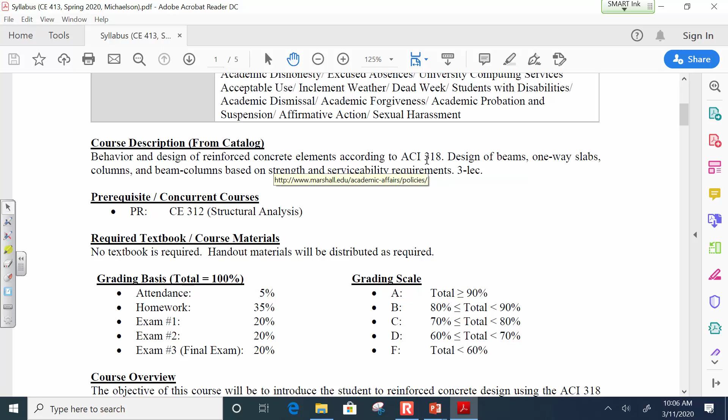Okay. All right, then let's get back to the wonderful world of concrete design. So last time what we were talking about was shear. We hadn't quite finished this example, but ultimately this is what we're going to plot, and this is going to become clear here in a little bit. So I'm going to do the math to come up with this plot very, very quickly, and then I want to talk about design. The analysis for shear capacity is really, really simple. It's very plug and chug.

All you do is you compute Vc, which is your shear strength provided by the bare concrete, which is 2 lambda b d square root of f'c, and then you compute the capacity provided by your stirrups, by the steel, which is the area of your shear reinforcement, the yield stress of that shear reinforcement, and then d over s, which is the number of stirrups that cross a given crack region. And then don't forget for shear, phi is 0.75. There is no determination of phi, it is just always 0.75.

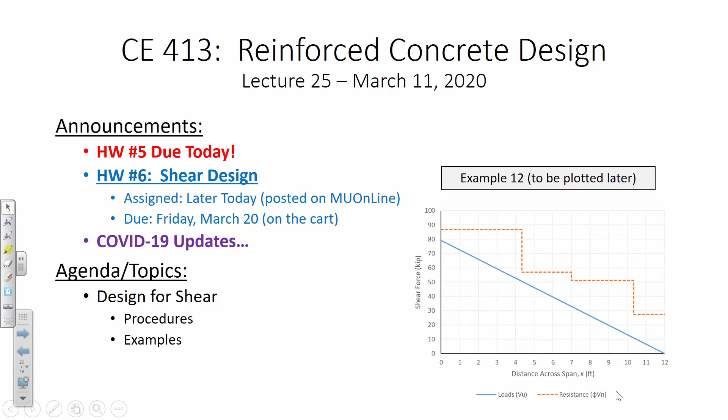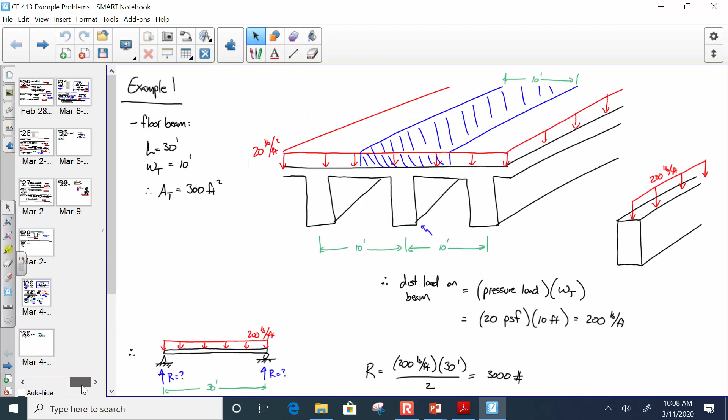Now what we had done last time was we looked at this example, and let me pull up the notes. It decides to load. So this is sort of what we had done last time. We looked at the beam and we decided that it was a simply supported beam with a uniformly distributed load, and so it turned into a structural analysis problem. Now our uniformly distributed load in this case is going to be 6.6 kips per foot because that's the factored load on the structure. The reactions ended up being 79.2 kips. And then we broke out some CE 312 structural analysis to determine an equation for shear.

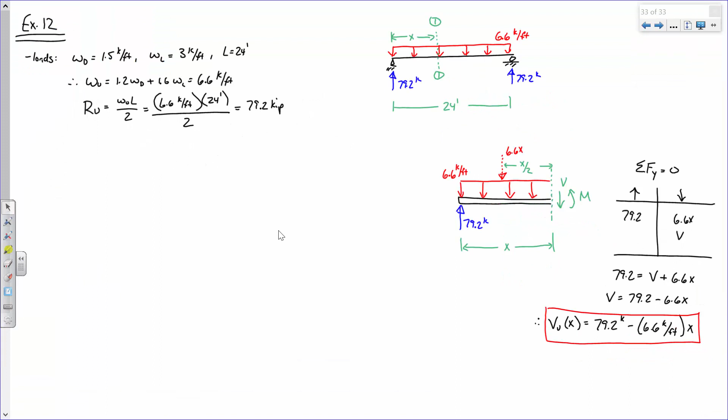I'm going to tell you right now, that is a skill you're going to need here, being able to determine equations for shear. We're going to need that. That's not going to be some academic exercise like it might have felt like last semester. We desperately need those expressions in order to lay out our stirrups. Now, that's the load, okay? And actually, let me break out this spreadsheet.

We had also started to plot this on a spreadsheet, and while it loads, I'll go ahead and move forward. I'm going to sort of cut all of this off. I'm just going to do my work inside here. Now, what I knew that was going to happen. All right. What I'm now going to do is look at the shear capacity. Okay, so the first thing I'm going to do is I'm going to compute the capacity provided by the concrete. So Vc is 2 lambda bw d square root of f'c, which is 2.

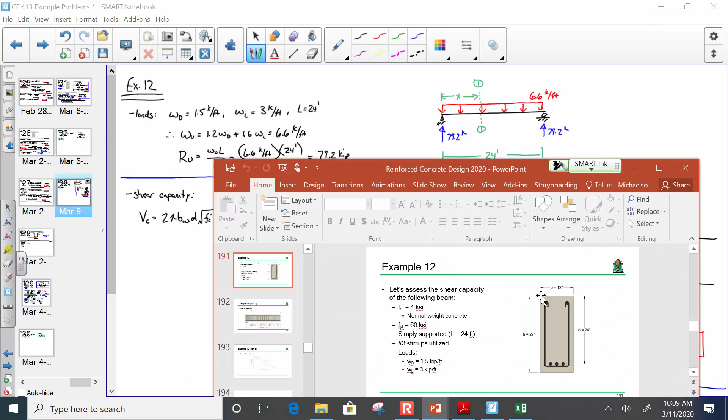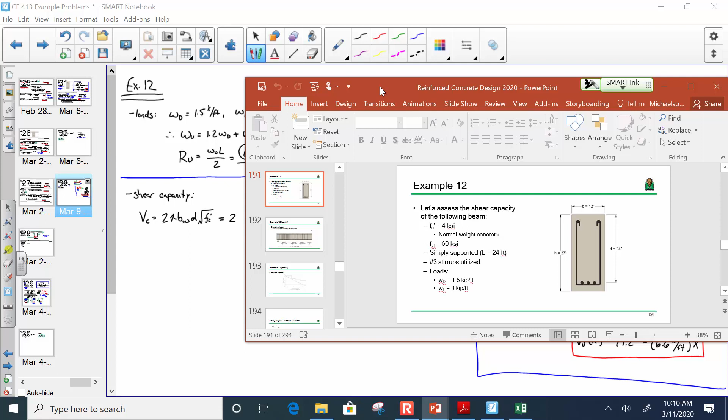Now let's go back to the beam, make sure everybody remembers what's going on. Here was the beam. So we have a beam that's 12 inches wide, and then the effective depth is 24 inches. It's 4 ksi concrete, and we assumed it's normal weight. So if we got normal weight concrete, what is lambda? 1. And then this is 12 inches, this is 24 inches, and this is the square root of 4, right?

No. Put in psi, and you get out psi. So I saw somebody, I said, this is the square root of 4, right? And I saw somebody shaking their head. Nope. Put in psi, get out psi. It's not 4, it's 4,000. So, plug and chug, and so what do we get as an answer here?

Anybody have an answer? Good. 3035.8. PSI. That? Yes. Wait, hold on. So it's 3035.8. I forgot the 12. Sorry. Hold on. I got 36,429. 36,429. Yeah. Now, what are the units for the answer?

So let's say for region 1. Okay? So S is 4 inches, D is 24 inches. Now FYT is 60 KSI. Now the big question also is, what is Av? Okay? Now does anybody remember Av? That's the area of your shear reinforcement. Now let's look at our beam. Let me close this. Let's look at our beam. Come on. Oh Lord. Computer's being slow today.

Now here's our beam. Now we have number 3 stirrups utilized. Now I can tell you the area of a number 3 bar is 0.11 square inches. Okay, that's a lookup. All right. Now if the area of the number 3 bar is 0.11, what is the area in shear? What's the area of our shear reinforcement for this beam? 0.22. And how did you get that? Well, and you're doubling it because if I crack across this beam, I'm cutting through 2 bars. Okay? So for this problem, Av is 0.22.

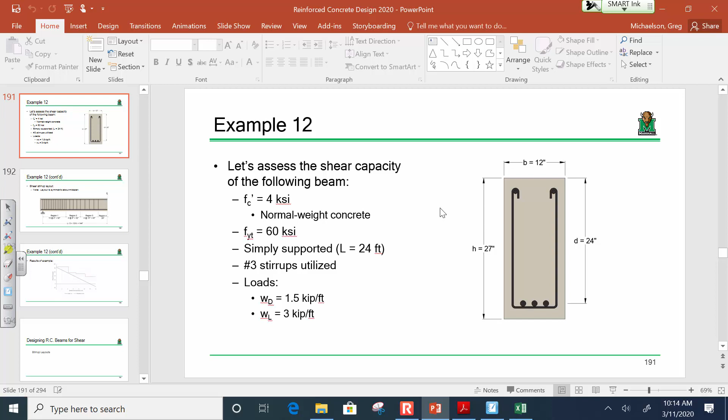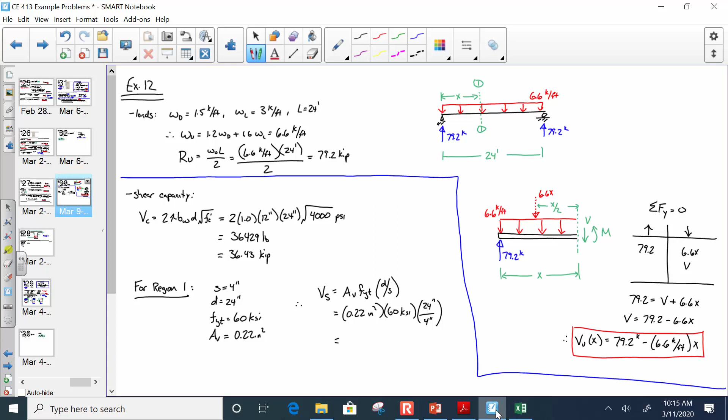All right? And again, the reason why is because we have a stirrup like this. If we had a stirrup like that, Av would just be 0.11. Okay? So the shape of your stirrup affects what your Av calc is. That make sense? So Av is 0.22 square inches. So VS is Av FY D over S. All right, 24/4. And so what is VS? May I have an answer? 79.2. 79.2 kips.

Okay, so therefore, phi VN is phi VC plus phi VS, which is 0.75 times 36.43 kips plus 0.75 times 79.2 kips, which is what? And don't forget your phi value. So when you're computing this, really the things you got to watch out for is don't forget phi, and recognize that you have to add kips to kips. Like you can't add pounds and kips. You got to make sure the units are consistent. So, everybody have an answer on this one?

Anybody? 86.7 kips. Thank you. 86.7 kips. Do I have a second on that? Okay, so let's sort of draw ourselves a little table here on the board, and we'll replicate this on Excel here in a second. So we have what? 4 regions. Okay, so I'm talking about these regions right here, okay? Now, with region 1, our S value, we said was 4 inches, okay? Everybody with me on that? Now, based on that, what did we get for phi VN? That's kips. Remind me, what did we just get? 86.7? So 86.7.

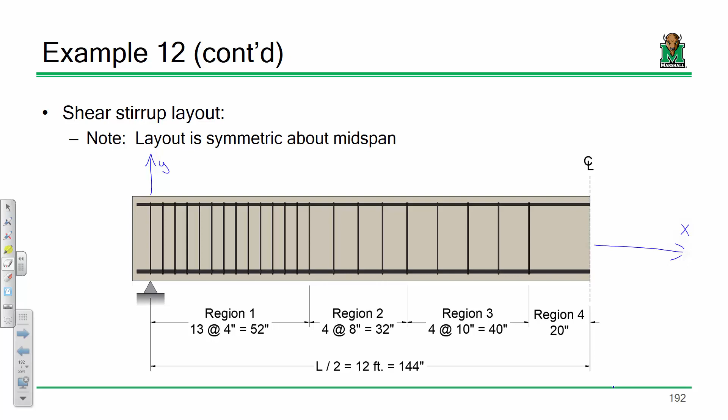So the beam's 24 foot long, and I'm only going halfway. But that doesn't matter because this beam is symmetric. You know, the loading is symmetric about the center line. So once you figured out what's going on up until the center line, you're good to go. Does that make sense? So let's go ahead and do the remaining regions. So help me out with this.

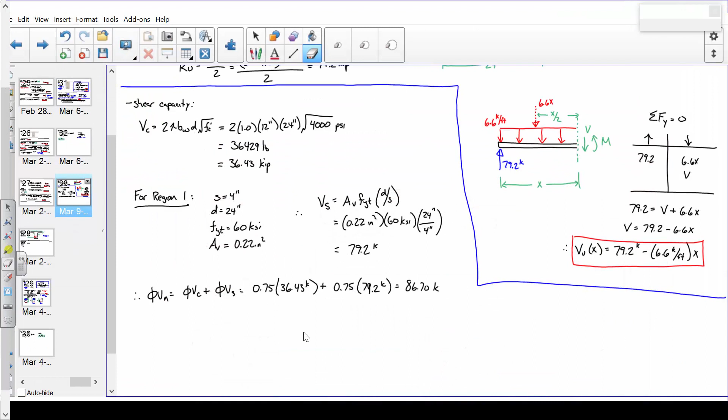So, okay, so somebody help me out, all right? Who's got a calculator? Mr. Schwartz. Help me out. If S is 8 inches, tell me what VS is. Everybody see what we're doing? Instead of 0.22 times 60 times 24 over 4, times 24 over 8. 39.6. 39.6. Anybody second them on that?

Okay. Now, with that value, tell me what phi Vn is. So 0.75 times this plus 0.75 times that. 57.02. 57.02. Do I have a second on that value? He's shaking his head yes. Okay. Since you're shaking your head yes, I want you to help me with the other one. So let's do S equals 10. Tell me what Vs is and then ultimately what phi Vn is. Start off with Vs.

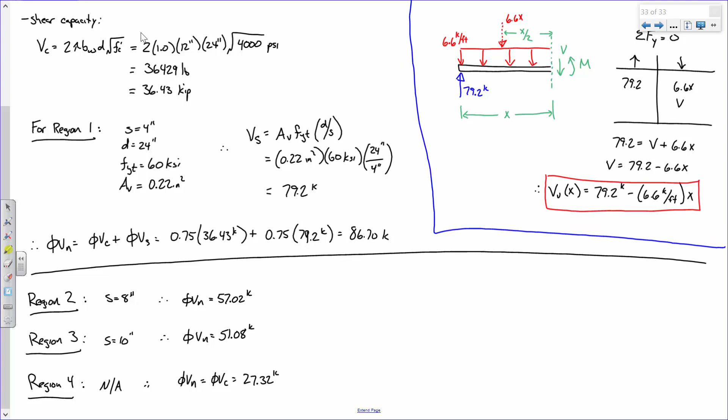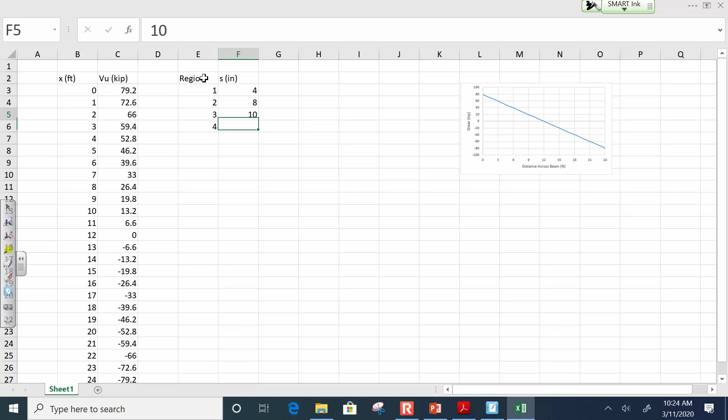So, for example, I can go over here. So this was the Excel problem I was doing, right? So maybe I'll do a little calculation over here. So what is it? So we had what region? 1, 2, 3, 4. So we have 4, 8, 10. And so what did we get? VS. So this is, those are the answers we got for VS, right? And then we have VC.

VC is 2 times 1 times 12 times 24 times the square root of 4,000. But that's going to give me my answer in pounds. Need to divide that by 1,000 to get kips. Right? And so phi Vn is pretty much what we got, right? 87 or 86.7, 57.02, 51.08, 27.32. Everybody with me on that? Okay.

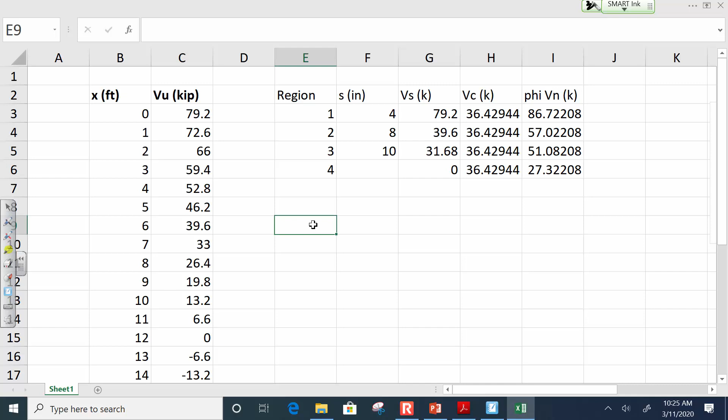Now, let's look at these regions. Okay? This is from x equals 0 to x equals 52 inches, right? This is from 52 inches to 84 inches. So far, so good? But the problem with that is if you look at my plot, does everybody see how my plot is in feet? So maybe what I ought to do is convert these to feet.

So what is 52 inches in feet? Help me out. 624. No, other way around. 4.3. So 4.33 feet. Okay, so this is 4.33 feet to what? What's 84 divided by 12, 7? 7 feet, and this is 7 feet to what? What's 124 over 12? Say again? 10.33. And this is 10.33 feet to 12 feet. Is that a fair statement?

So, let's look at a new plot. So, okay. So you're telling me from 0 to 52 or to 4.33 feet, the capacity is that? Is that what you're telling me? And then from that to that, the capacity is that. Then from 7 to, what is it? What was that, 124?

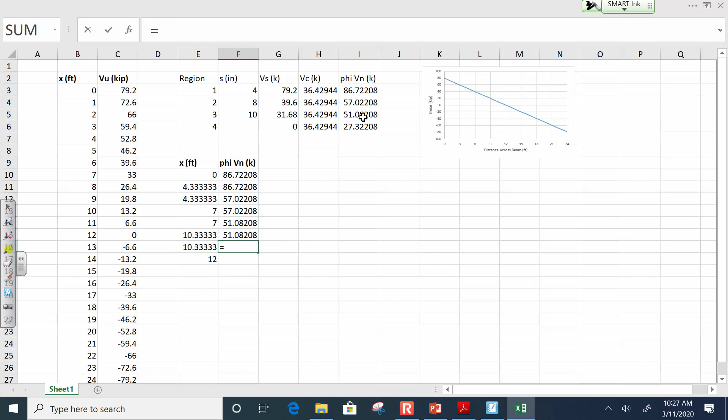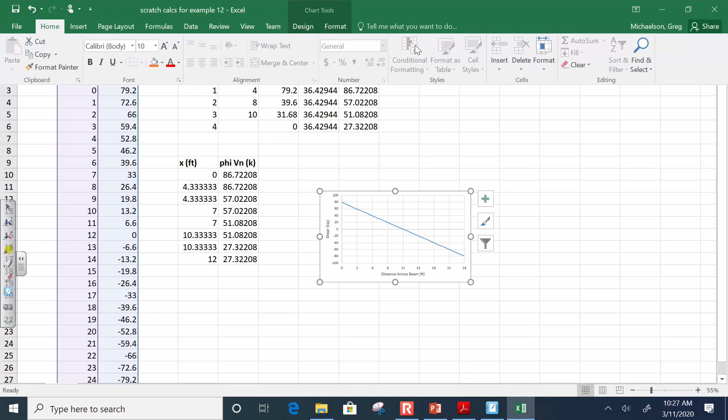The capacity is that. And then from that to 12, the capacity is that. Is that a fair assessment? So watch this. Let's take our plot. Let's add some data.

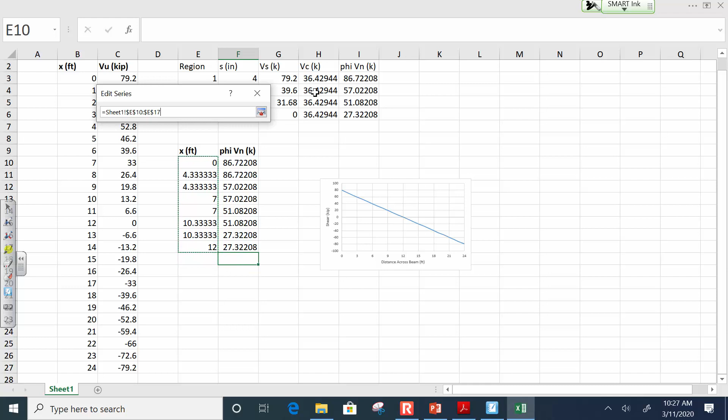X values, we'll add these. Y values, we'll add these. See what happened? So does that chart kind of make sense? So like from 0 to about 4 some feet, that's the capacity. And then as we go down, the capacity lowers. So everybody kind of see what I did there?

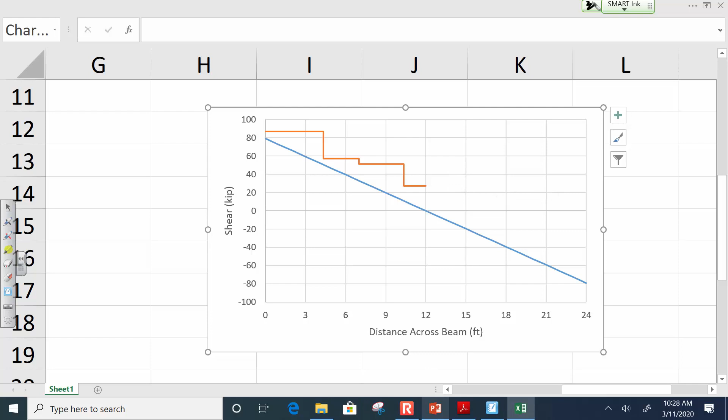So what I'm plotting is the capacity of the beam versus its loads. And you see the capacity is always higher than the loads, which is what we want. We want more capacity than the loads that we're subjecting the beam to. So that, if you want to know, is how I got that plot I showed you earlier. Let me go to the announcements. If you remember, that's how I got that plot. I just plotted this on top of that.

Does that make sense? Now, don't worry, I'm not going to make you do that on a homework or on an exam. What I am instead going to make you do is lay out the stirrups so this happens. Okay? So there's a couple things I want you to keep in mind. The first thing is that as you get closer to the support, your stirrup spacing tends to get smaller. Like you might start off with 4-inch spacing, then go to 6-inch spacing, and then maybe go to 12-inch spacing or something like that.

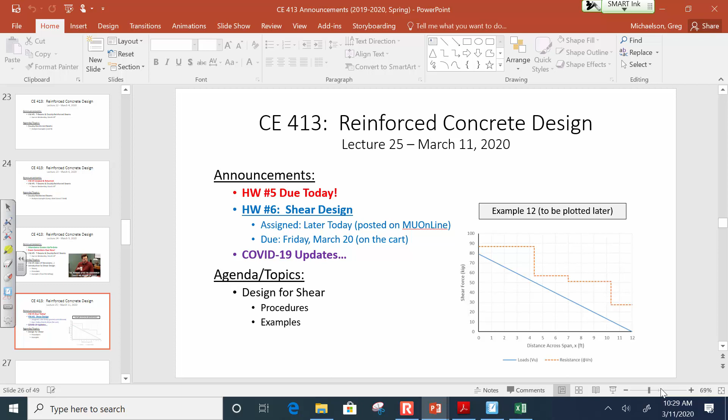And 2, as long as your capacity or your stirrup spacing is sufficient to resist the load, you're good. Okay? Now, does everybody kind of get the idea? All right. Let me tell you how we do it, and then we're going to have a full-blown stirrup design start to finish here in a bit. So let's talk about the method. But first, any questions on what we've been doing so far? Okay. Let's talk about the method.

Okay. So like I said, this is going to be a little unique. It's way different than moment design, but it's definitely a little bit more interactive. Now, when you're designing for shear, the unknown is the stirrup spacing, right? Because you've got your beam, you know the loads that are on it, you know that the beam is being subjected to uniform distributed load, you know the size of the beam, and so ultimately you're trying to space out stirrups to resist that load.

So let me show you what I got going here. So φVn equals φVc plus φVs, right? If you're trying to figure out the spacing, what do you have? Well, the capacity's got to be greater than the load. The capacity is φVc plus φVs. I know what φVc is, and as for Vs, it's Av times fy times d over s. So just take this equation and solve for s. It's that simple. So if you can understand that expression, you're rocking and rolling. And we're going to be using that expression in various forms to solve for required stirrup spacings across the span. So don't worry, I got a little procedure I'm going to show you here in a second.

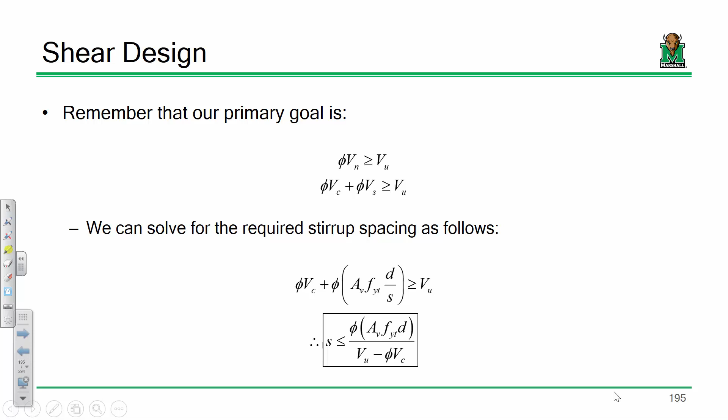Now, let's talk about ACI. ACI states the following. Let's do a little bit of figuring here. So what do we got? You would agree that φVn has to be greater than or equal to Vu, right? The capacity's got to be greater than or equal to the loads. So φVn is φVc plus φVs, greater than or equal to Vu. So it might stand to reason, what if I have a region that doesn't have very much shear force on it? So much so that I actually don't need any stirrups. Let's say the concrete has enough capacity.

Well, what ACI says is that's great, but you're still going to put stirrups there. In fact, ACI says any time the shear is greater than 1/2 of φVc, you got to put stirrups in there, even if you don't need them from a structural capacity standpoint. Remember what I said about shear, right? When an element fails in shear, it goes quick. So ACI says, I don't care if the concrete is strong enough by itself to hold up the load, you are still going to put stirrups in any region where Vu is greater than 1/2 of φVc. And the way that we design that will become clear here in a little bit.

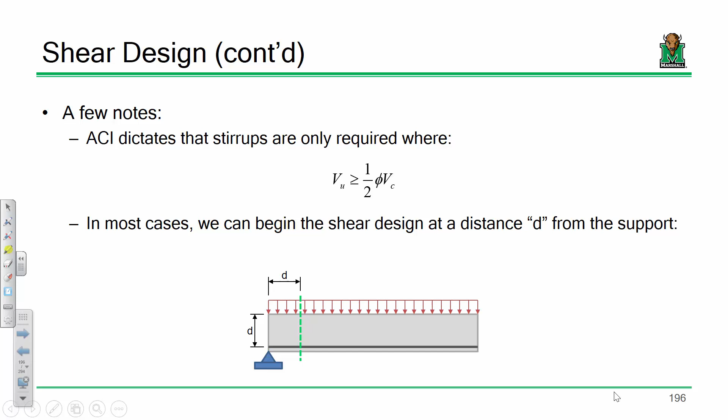Now, that doesn't mean that we do that in all cases. There are certain cases where we cannot do that in concrete design. One of the biggest ones is when you have monolithic construction. So you have, let's say, a beam and a column cast integrally. When that happens, you do have to use the shear right at the base of the support.

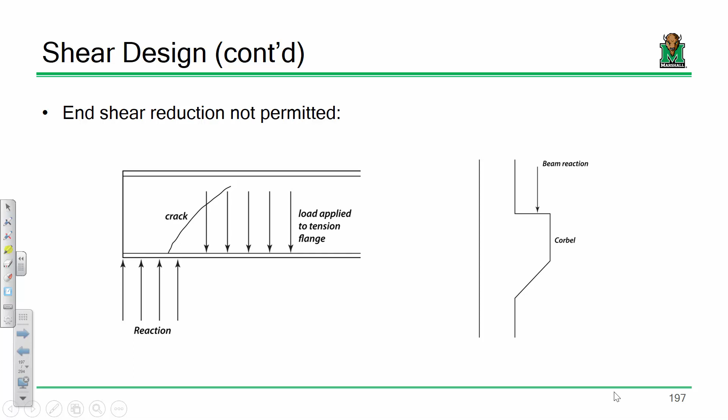One very common concrete detail that you'll see in commercial construction is the use of what's called a corbel. So if you go to like a parking garage, you will see a column with this little nubbin sticking out of it, and the beam sits on top of this little nub. That nub has a technical term, we call that a corbel, okay? Whenever you're designing the shear reinforcement for this corbel, you use the shear right there at the support, not D away. You also have to use the shear at the support whenever you have load applied to the bottom right there near the support. But in most typical loading scenarios, you can back that off and actually go D away from the support. Don't worry, I'll show you how to do that here in a little bit.

Now, for the regions where the concrete alone can carry the capacity, in other words, the code says we have to put stirrups there, even though we don't need them from a structural capacity standpoint, what we would do is utilize the maximum spacing. So there are two maximum spacing values that we have to provide. One of them is just based off of maximum spacing limits to ensure that the stirrups provide the capacity we want them to. And if you recall from an earlier lecture, there were actually two limits. I'm just going to use the first one since it's a little bit more stringent. Don't worry, I'll summarize a lot of these formulas for you later.

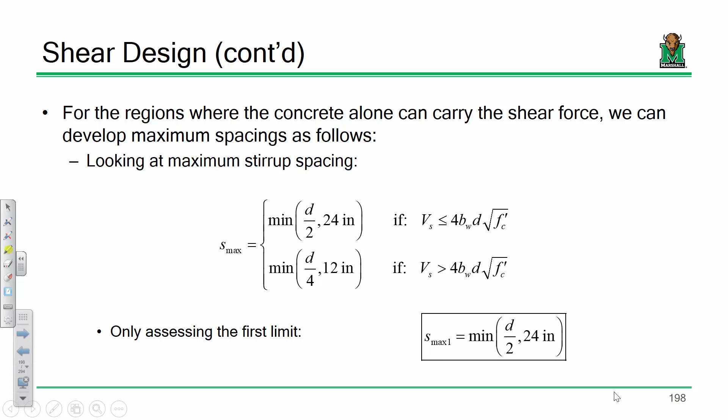So S max 1 is just going to be the minimum of either D over 2 or 24 inches. And then the second limit comes from our minimum steel reinforcement requirement. Remember, the code does say that we have a limit on how much steel we can provide. And I don't use that limit to solve for what's the required Av. Instead, I back calculate that and I say, okay, well, what stirrup spacing do I need to provide to meet

that limit? And usually we can choose a stirrup at the beginning of the problem. We can say, let's say we're going to use number 3 U-shaped stirrup. So we know Av is 0.22. So in order to satisfy this limit, we just figure out what does S need to be. And so we get a maximum stirrup spacing.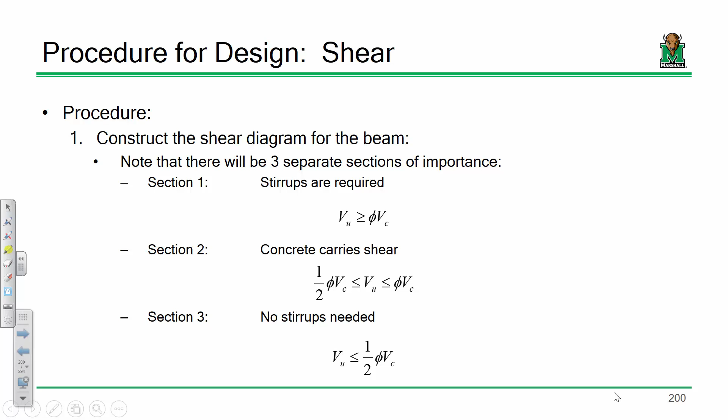But like I said, we're going to have 3 regions, one where the stirrups are required, one where concrete carries the shear and where you would probably use S max, and then finally where you don't need any stirrups at all. Okay. Any questions? All right. That's procedure 1. Now let's go on to step 2.

The next thing that you do once you've got your shear diagram is you figure out your starting S value. And so your starting S value, you figure out the required stirrup spacing at a distance D away from the support. And so that shear D away from the support, I'm calling that VU star. So that's the very, very first shear spacing that you provide. So using that equation I derived before, you solve for the required stirrup spacing. So phi AV FY D over VU star minus phi VC. That's a plug and chug expression. And then you just solve accordingly.

Now, one of the things to keep in mind is that this is a mathematical equation. We're solving for S. So when you solve for S, you're going to get S is 4.32638739. You are not going to tell a contractor to use 4.362839, blah, blah, blah. Okay, now let's talk a bit about conservatism, because I want this to make sense. Let's say you're on step 2 and you solve the equation and you get S required is 4.32 inches. What are you going to use? 4-inch spacing. You don't round up, you round down, okay?

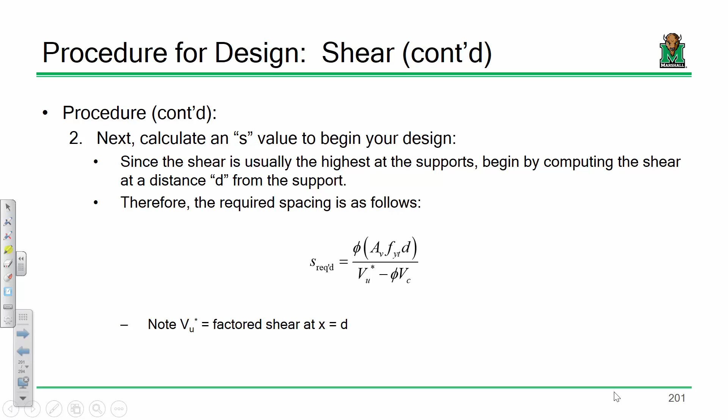Ultimately, the goal is to reduce the number of stirrups in the beam overall. And don't worry, when we start doing examples, this will become clear. Now, we can actually stop the problem right there. We're not going to get to a problem today. We'll start this on Friday, either online or in class.

But to improve the design, we can also use the maximum spacing, because if here's my shear diagram, in these regions of high shear, I might need to use like a 4-inch spacing, but regions down here, I could probably use like a 6, 8, 10, 12, whatever. But I'm going to be limited by my maximum spacing. So at the very least, I'm going to have my required spacing at the very beginning, and then my maximum spacing that I can utilize. So to improve the design, I want to use my maximum spacing as well.

I might want to try and throw one in the middle. Well, what happens if I throw in an S equals 6 inches? Maybe if I put a region in the middle, I can shave a couple stirrups off the beam. And you might think, oh, well, who cares if you've got one more stirrup in the beam? Yeah, but you might be using that beam 800 times in a given building. So getting that one beam optimally designed might be important if you're going to repeat that design over and over again. Does that make sense?